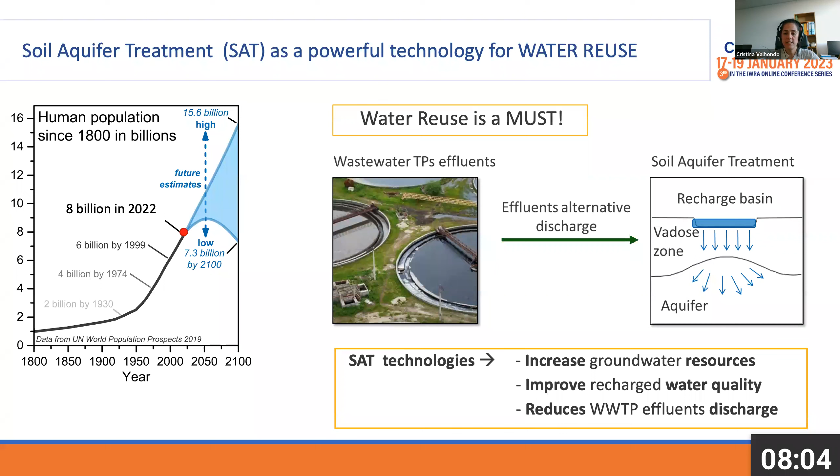And one option to do this is soil aquifer treatment, which is a special case of managed aquifer recharge that consists in induced infiltration of effluent of the secondary treatment of a wastewater treatment plant through the vadose zone to reach the aquifer. Doing this, we increase recharge water quality, and we also increase the groundwater resources. And besides, we reduce the direct discharge of this secondary treatment effluent into the aquatic environment. Next, please. No, the one before.

We have to be careful because the secondary treatment effluents are characterized for containing a number of contaminants, such as trace organic contaminants that are not completely removed in wastewater treatment plants, mainly because these plants are not designed to remove these contaminants; viruses and bacteria, that even if they are efficiently removed, they are not completely removed. And besides, we know now that wastewater treatment plants represent a hotspot for antibiotic resistance, which is going to be one of the major issues in the coming years.

And also micro and nanoplastics, that are highly persistent, and they include another problem, that they can facilitate the transport of other contaminants. So it's very important that we know the fate and behavior and the processes that control the behavior of these contaminants during soil aquifer treatment in order to avoid groundwater contamination. Next, please.

So the main two processes involved in the transport of these contaminants are sorption and biodegradation. And both processes are dependent on a number of parameters, including the physicochemical properties of the molecules, the surfaces, and also the redox state of the environment that controls the microbial community and the metabolic pathways that they apply to degrade the emerging contaminant.

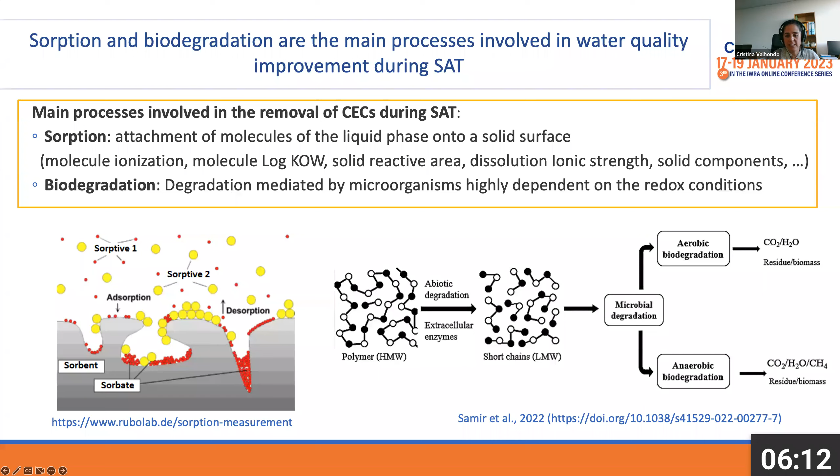So knowing the parameters controlling these processes, we can manipulate the system to increase the efficiency of these systems. One approach is, for example, to install reactive barriers in the infiltration area of this system. And this reactive barrier can provide new sorption sites that will increase sorption and also release dissolved organic carbon to the recharge water. So we will develop a broad range of redox conditions and we will increase biodegradation. And these reactive barriers have already been tested at field scale and they show very promising results.

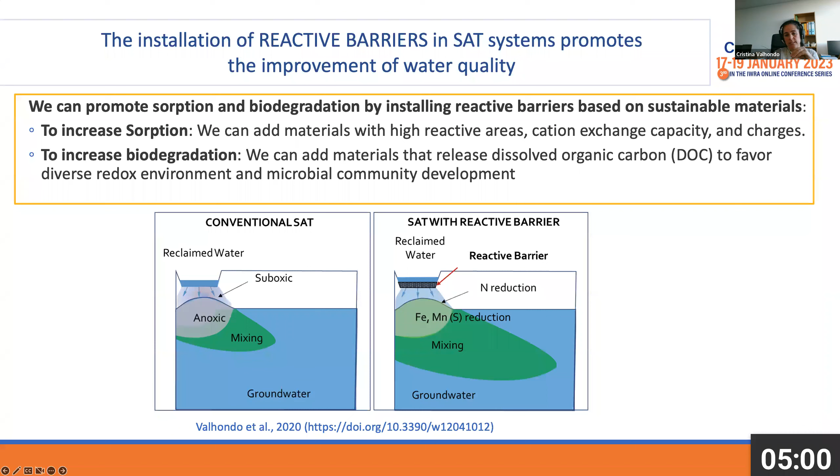So the objective was to study the capacity of several materials in order to improve the sorption of emerging contaminants. And we do so through batch experiments.

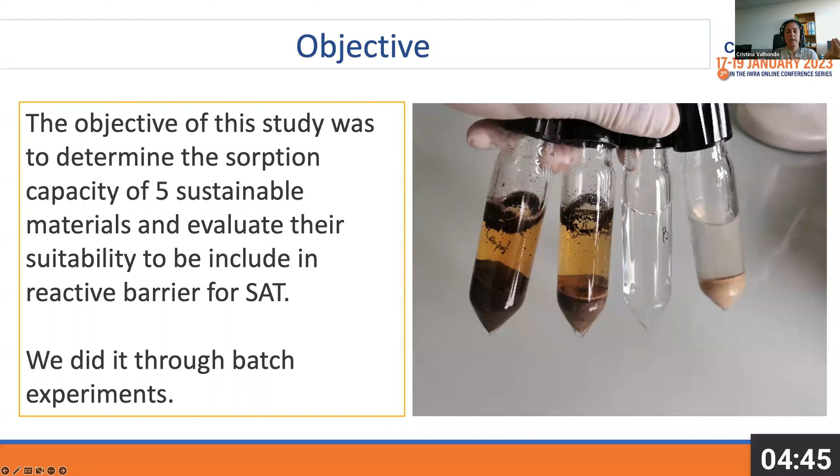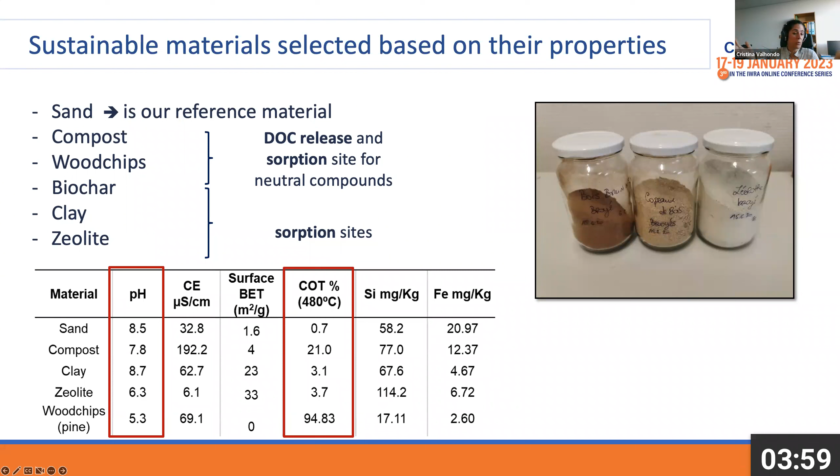First, we select the 5 materials and we compare their sorption capacity to sand. That is the material that we normally find in the infiltration area of SAT systems. The materials we select are based on their sorption capacity, like clay or zeolite, or because they are able to release a great amount of dissolved organic carbon into the recharged water. In this case, we select compost, wood chip, biochar, clay, and zeolite, and we measure the physicochemical parameters in the laboratory. And we have a great broad range of values of these parameters.

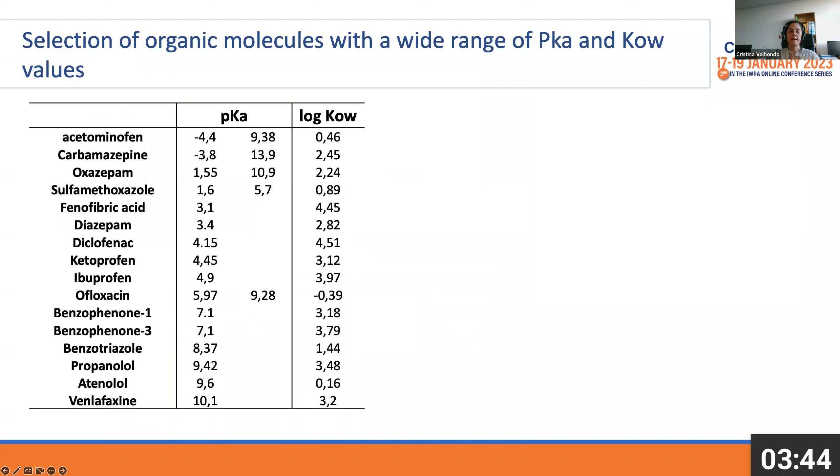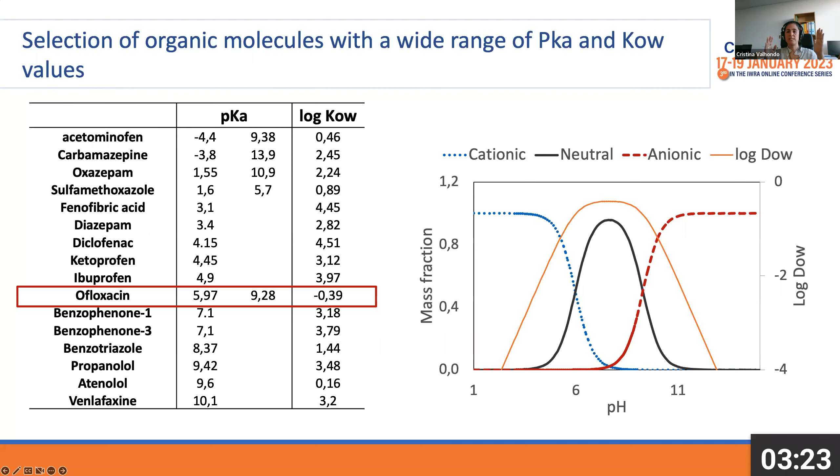The methodology consists in putting together a volume of water spiked with known concentration of these molecules and a volume of crushed material for 60 minutes. So the time is not enough to have biodegradation. And we also perform batch experiments without material to see if we have losses of the molecules due to processes other than sorption. Afterward, we separate the phases, we analyze the concentration of the molecules in the supernatant, and we are able to define the amount of molecules sorbed in the different materials.

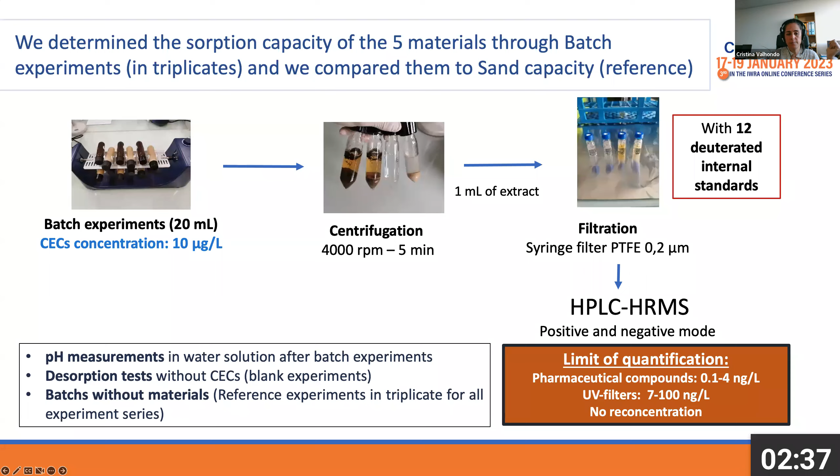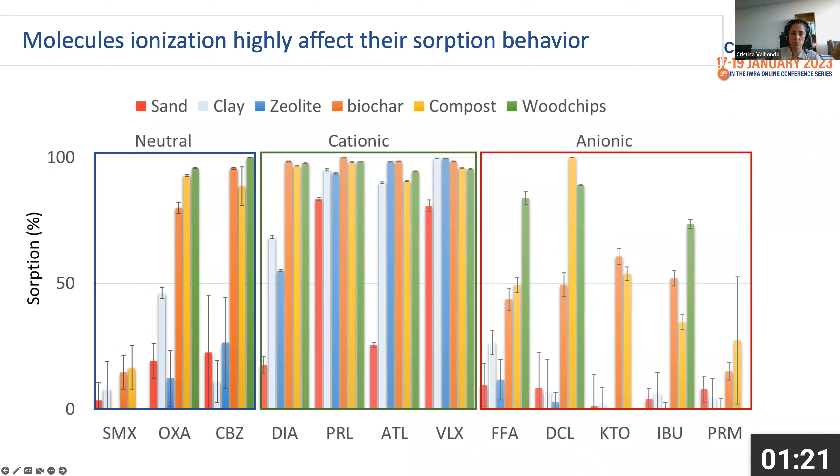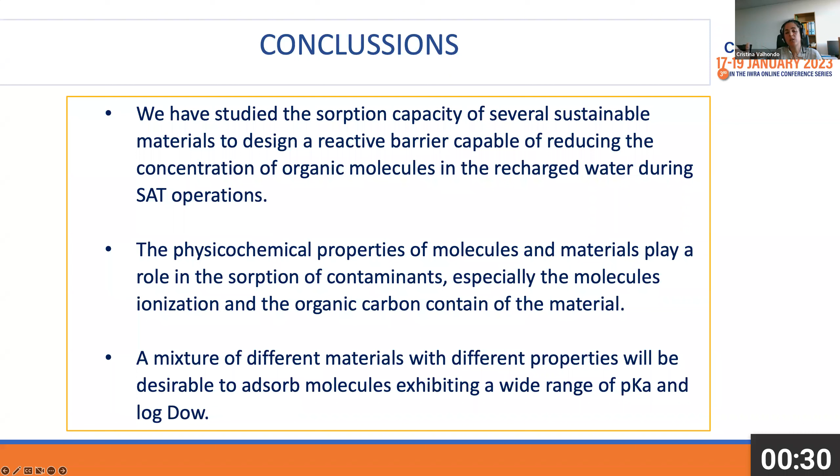So to summarize, we studied the sorption capacity of several sustainable materials and compared them with sand. And the physicochemical properties of the molecules and the material play a role in contaminant sorption, especially the molecules' ionization and the organic carbon content of the material. The molecule ionization we can also control in a way by adding some materials that give a lower or higher pH. So we have some capacity to manage the system by adding some materials. And finally, the optimal situation will be to have a mixture of different materials to increase the number of molecules that can be sorbed into this material.

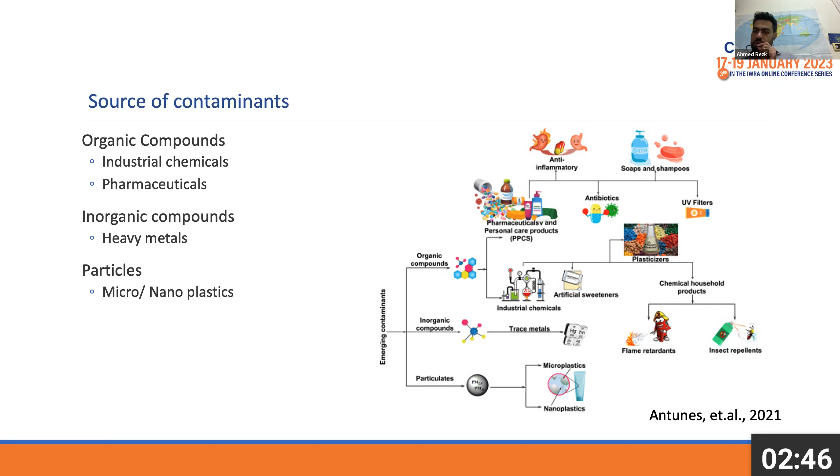And back in 2013, a paper in the Egyptian Journal of Occupational Medicine found that emerging contaminants exist in different wastewater sources, such as domestic activities, agricultural activities and industrial activities. The next slide, please.

Therefore, in order for us to define the emerging contaminants at the beginning of our project, we resorted to two main sources. First is the literature on the detection of emerging contaminants in Egypt, and also on the most prescribed medicines in Egypt and their consumption. And out of these lists, we check the human and veterinary use of the pollutants, the mode of action of each contaminant and the environmental impact of each contaminant. The next slide, please.

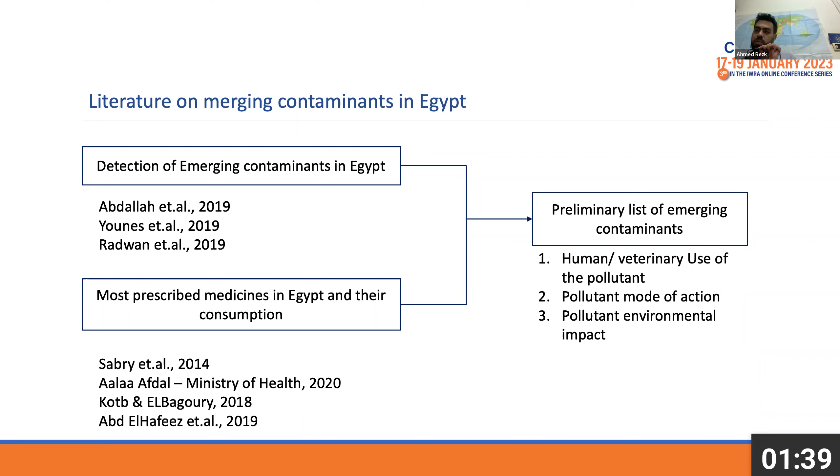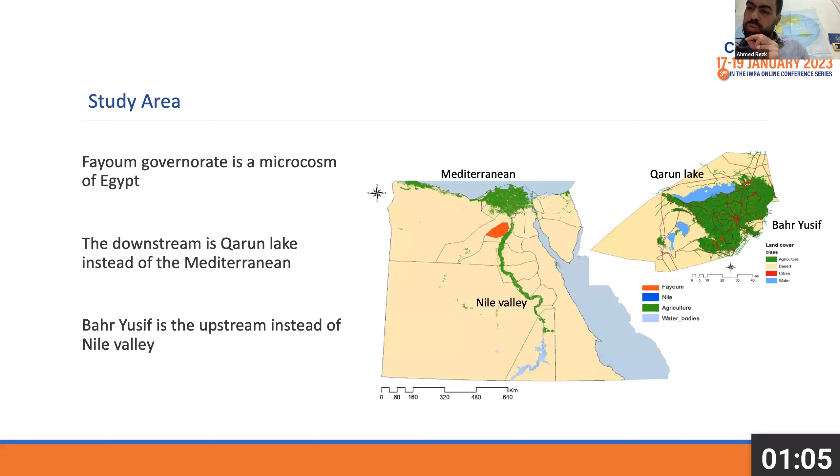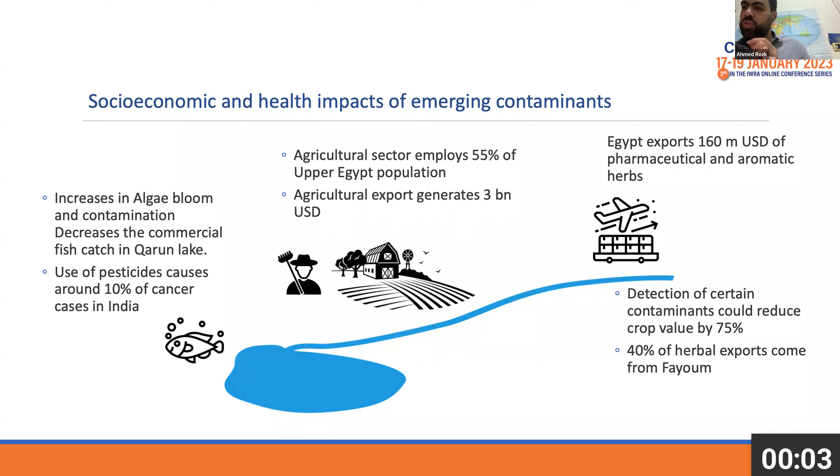And the impacts of these contaminants in Fayoum have three main lines. First is the contamination in Qarun lake, and then the contamination in the agricultural product, which reduces the value of the product and reduces the productivity of the land. The next slide, please. So the contamination in Qarun lake affects the commercial fishery in the lake, and also given that the agriculture sector employs a large section of the Egyptian population, especially in Upper Egypt, this has an adverse economic impact. The next slide, please.

Excuse me, Ahmed, can I ask you to summarize your bottom line, please, on your presentation? Yes, sure. Okay, so very rapidly, given the different adverse impacts of the emerging contaminants on the environment, and also the different sources of these contaminants, there is a need, I think if we could go to the last slide, please. Yeah, the next one. Yes, the one before it.

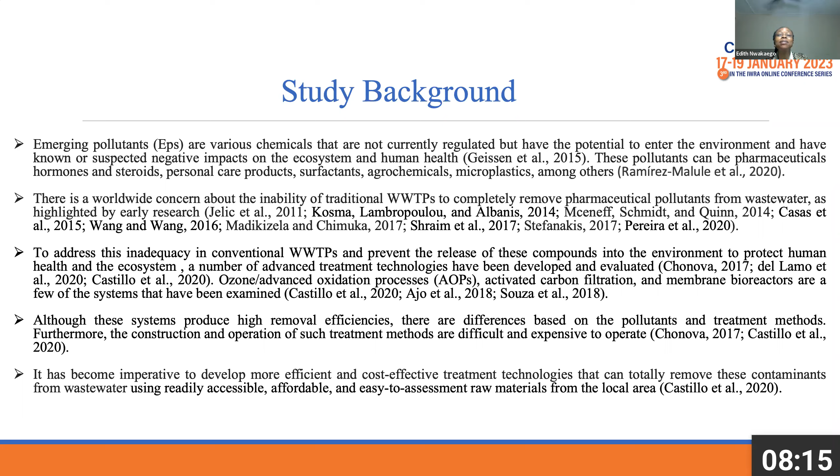Next slide, please. Clay can be molded into various shapes, which they retain when they dry. So naturally occurring clays are widely used for contaminant remediation due to their easy availability, high adsorption capacity, high porosity, high cation exchange capacity, and high surface area. Worldwide, clay has been used by man from time immemorial for both industrial and domestic application. Today, clay is still very useful in the ceramic industry for processing several forms of ceramic materials. However, the particular application of clay depends on its mineralogy, physical and chemical properties.

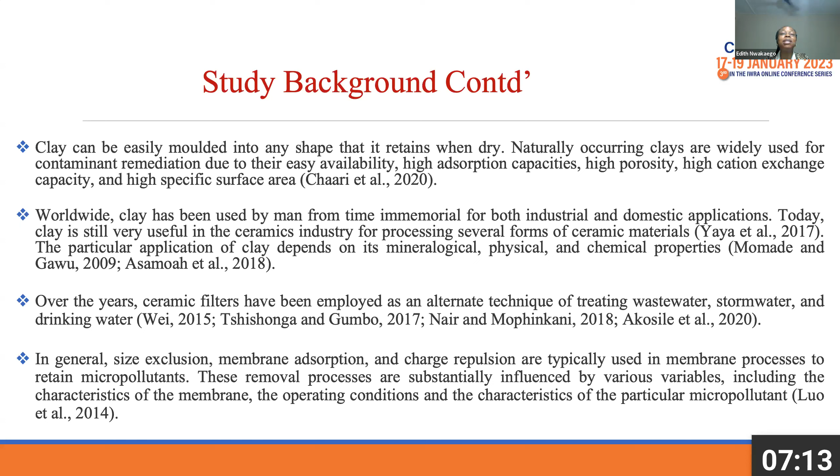Over the years, ceramic filters have been applied as an alternative treatment system for treating wastewater, stormwater, and drinking water. So ceramic filters achieve these removal processes through size exclusion, membrane adsorption, charge repulsion, sedimentation, biodegradation, among others. Next slide, please.

Next slide. So the aim and specific objectives of the study. The main aim of the study is to investigate the efficiency of the ceramic membrane filter for removal of pharmaceutical contaminants from wastewater through filtration experiments. Two is to determine the effect of operating parameters such as flow rate, pH, sludge retention time on the pharmaceutical removal efficiency. Three is to determine the effect of clogging on the ceramic membrane filter for 4 months continuous operation. Next slide, please.

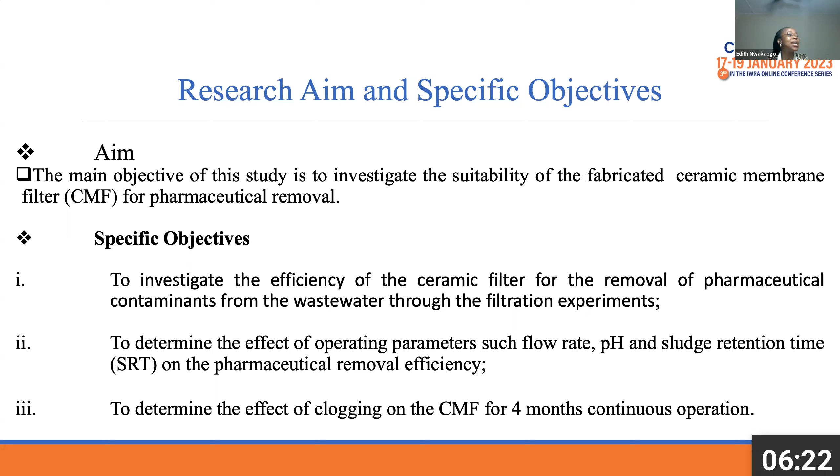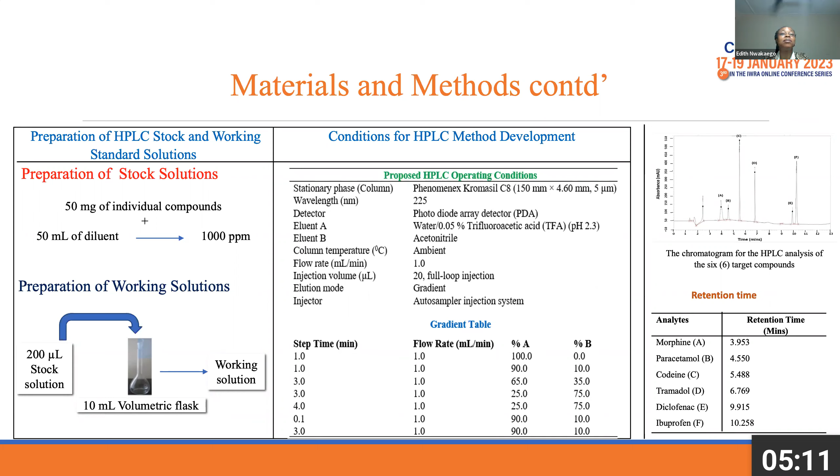Next slide. Now, this particular slide shows the operating parameters of the HPLC that was used for the analysis of the selected compounds. So over here, you can see the chromatograms of the HPLC analysis for the 6 selected compounds. The analysis of these compounds was achieved by comparison with the retention times in conjunction with the PDA, which is the photodiode array detector. Next slide, please. Now, over here is the slide showing the different processes that took place during the filter fabrication. Next slide, please.

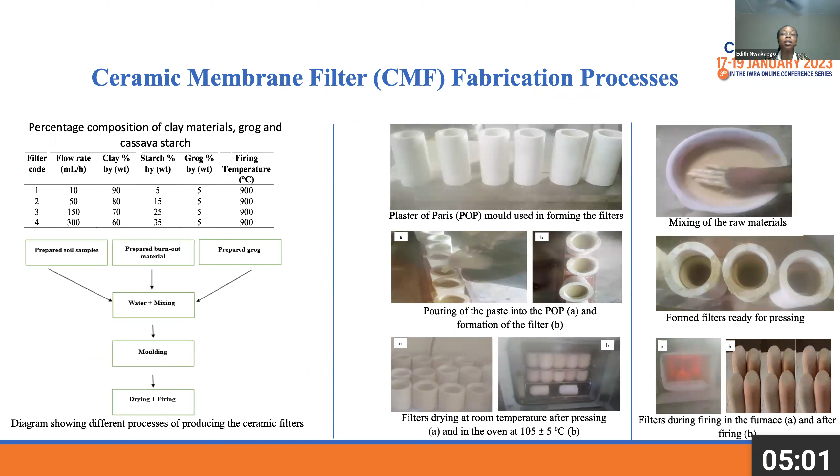Now, this is the setup for the ceramic filter experiment. So you can see the wastewater treated at the flow rate of 50, and then the one treated at 150 and 300. The one treated at 50 is more clear and more clean than the ones treated at 150 ml per hour and 300 ml per hour.

So this slide also shows the conditioning step of the SPE cartridges and then the extraction processes that took place. After the extraction processes, the analytes were eluted into chromatographic vials, and they are ready for HPLC analysis. After the HPLC analysis, the equation displayed here was used to calculate the removal efficiency. Next slide, please.

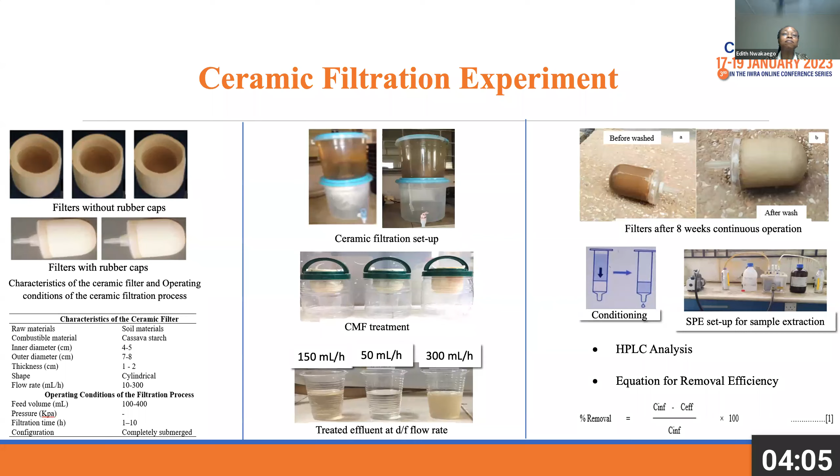Next slide. Now, the effect of flow rates on the pharmaceutical removal. The removal efficiency was tested for 4 different filters, such as 10, 50, 150, and 300 ml per hour, in order to select the best filter that can treat these pharmaceutical contaminants. Looking at the graph, it indicated that as the flow rate increases, there is a decrease in removal efficiency.

The reason is because as the water flows at a very high flow rate, it has less contact with the filter element, and that will reduce the rate of filtration, reduce biodegradation, reduce sedimentation, and also reduce adsorption, leading to a lower removal rate. So as the flow rate decreases, we have a higher removal efficiency. Next slide, please.

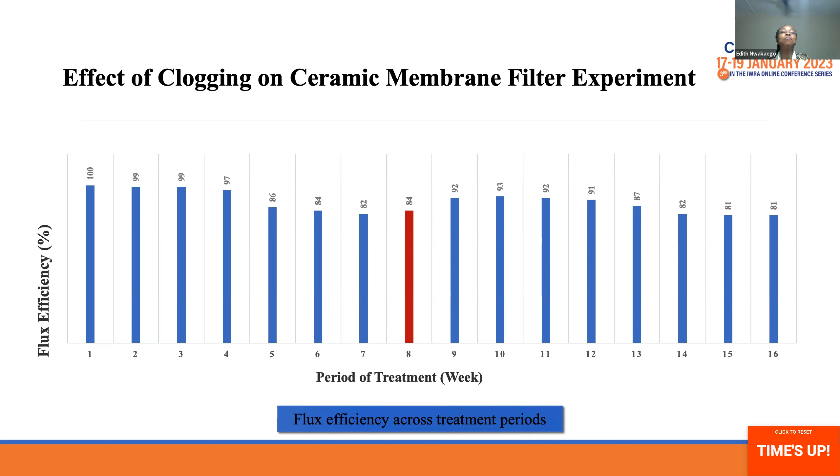Next slide, please. Can I ask you?

Oh, thank you. Conclusion. The present study indicated that ceramic membrane filter experiments operated at a smaller flow rate combined with increased retention time achieved the best performance among the studied compounds. Considering the high removal rate of other pharmaceutical compounds under normal wastewater conditions, the ceramic membrane filter can be considered an efficient and economical treatment method and could be applied in several related industries.

So the inability of the developed ceramic membrane filter to remove diclofenac and ibuprofen under normal wastewater conditions makes it easier for future researchers in the modification of the ceramic membrane filter with the objective of removing diclofenac and ibuprofen to an acceptable level. Thanks for listening.

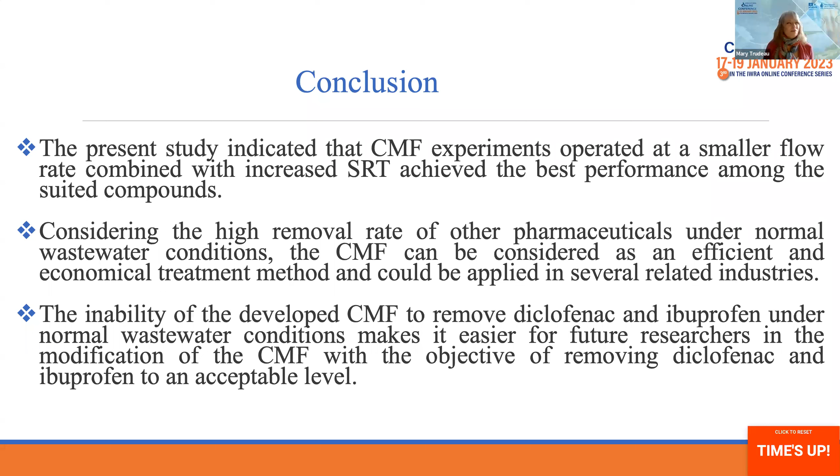Thank you very much, Edith, for that. The results are encouraging for a material that's as accessible as ceramic. Unfortunate about the ibuprofen.

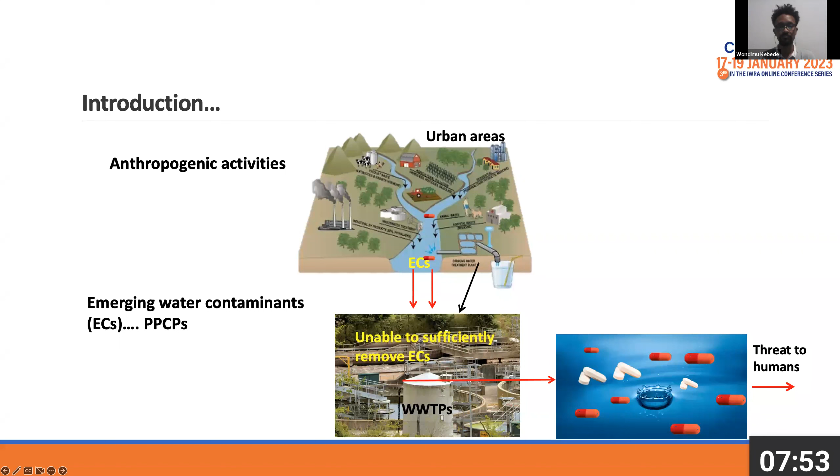As a result, various technological options have been implemented so far, like advanced oxidation processes such as ozonation, electrochemical oxidation, and adsorption processes, membrane technologies, but still there are issues associated like cost, safety, and operational difficulty. These membrane technologies, in most cases, are very costly, and operational difficulty is also there. So research intervention is still necessary to come up with low-cost, safe, and sustainable technological options.

In this regard, adsorption seems to be very interesting because of its low cost. We can prepare adsorbents from low-cost materials and even from waste materials. Next slide.

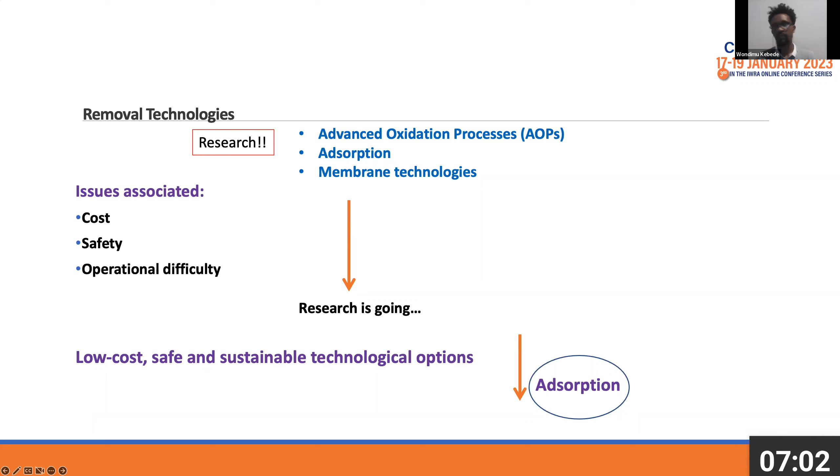So in our work, we prepared an adsorbent from bamboo sawdust, which is a waste material, and activated it chemically using potassium hydroxide and ferric chloride. Under heat, we chemically treated it, and the chemically treated bamboo sawdust was ground and carbonized at 700 degrees Celsius, and then used as an adsorbent in the subsequent adsorption process. Next slide.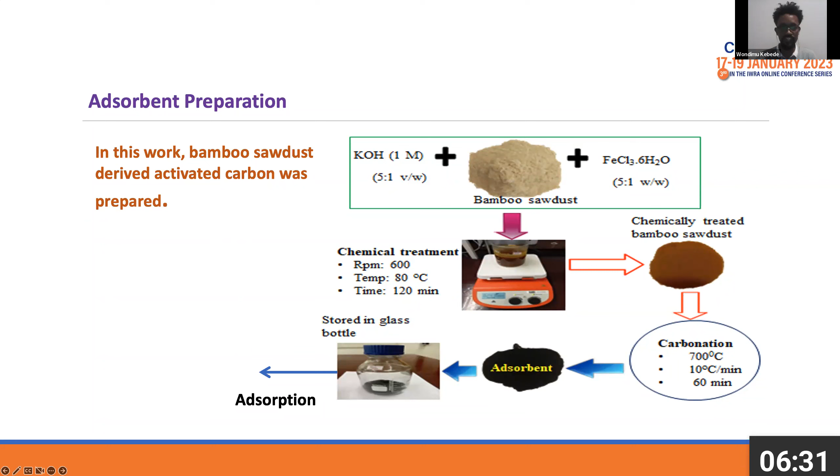When we come to the adsorption study result, the material that we prepared from bamboo sawdust resulted in the removal of 99.6% of paracetamol, which means almost complete removal. This high removal is associated with the high surface area of the material and some important functional groups incorporated during chemical activation. The adsorption process was characterized by the pseudo second order kinetic model, and the Langmuir isotherm gave the best fit to the adsorption data. Thermodynamically, the process was spontaneous and exothermic in nature.

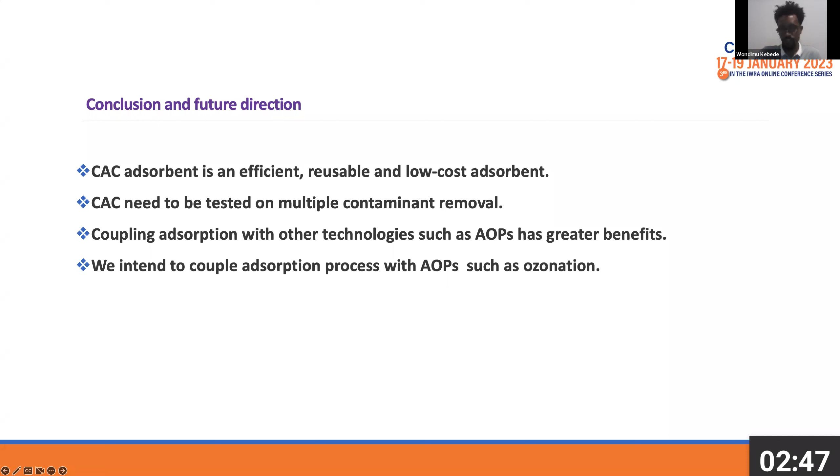Another thing is coupling adsorption with other technologies such as AOPs, advanced oxidation processes, has greater benefits because of the synergy, because each technology has its own advantages and disadvantages. So we intend to further test this adsorbent coupled with advanced oxidation processes like ozonation, so that we can have a synergistic effect in removal of multiple emerging pollutants at a time. So next slide, please.

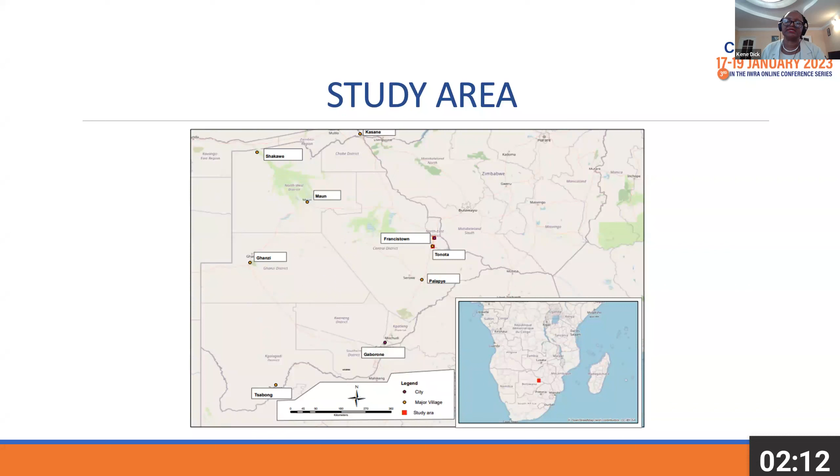Next slide. Now, the motivation for this study was the pollution that is caused by the wastewater generating facilities. The monitoring results over the years were indicating that the wastewater discharge facilities in the country are not in compliance with the wastewater discharge standard, BOS 93:2012. And the major contributors to the pollution are the trade effluent generating industries. And this study was trying to find a solution that can help these industries to curb the pollution at source. Next slide.

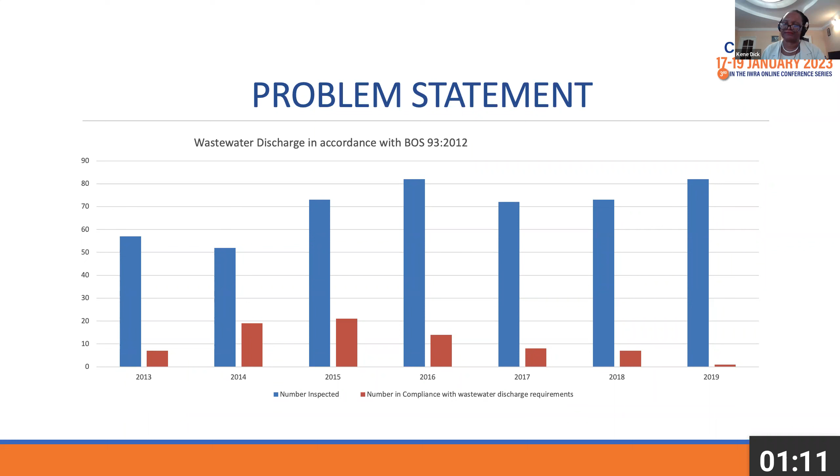This was a qualitative case study where data was collected through semi-structured interviews, as well as reviewing the documents that were collected from the industry. These were the annual reports, as well as the policy documents that were collected from the public domain and also from the government offices. And data was analyzed through data coding and then grouped into categories, and then themes and assertions were developed in order to answer the research questions. Next slide.

Now, the results of the study: as I've already indicated, the data was collected in the form of words, and these words were categorized or grouped accordingly to answer the research questions. And 6 themes were developed from the results of the study. Next slide is the last slide.

Now, the recommendation given to the industry is that the industry has to adopt the SD principles in their strategic framework in order to be able to curb the pollution at source, because we've already realized that it is difficult for the wastewater treatment facilities to treat industrial effluent because of its high strength or the composition of chemicals that it has.

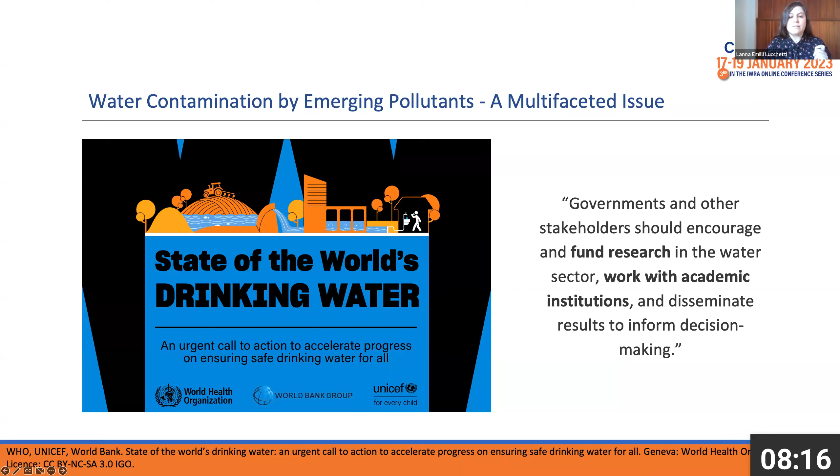And what those have in common is that they can react in a non-selective way with organic molecules, and these account for the structures of the vast majority of the emergent pollutants. So they can react with them in a non-selective way and break them down all the way to CO2, water, and inorganic ions. So this is a very interesting process when we are talking about a general solution to address the emergent pollutants contamination in water.

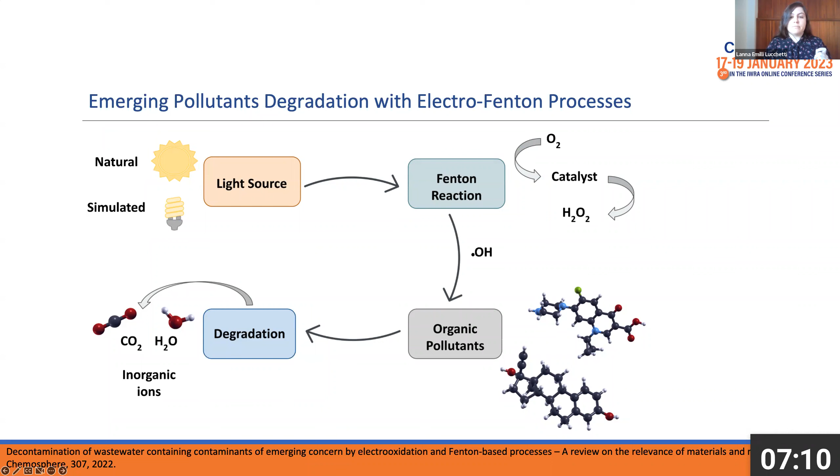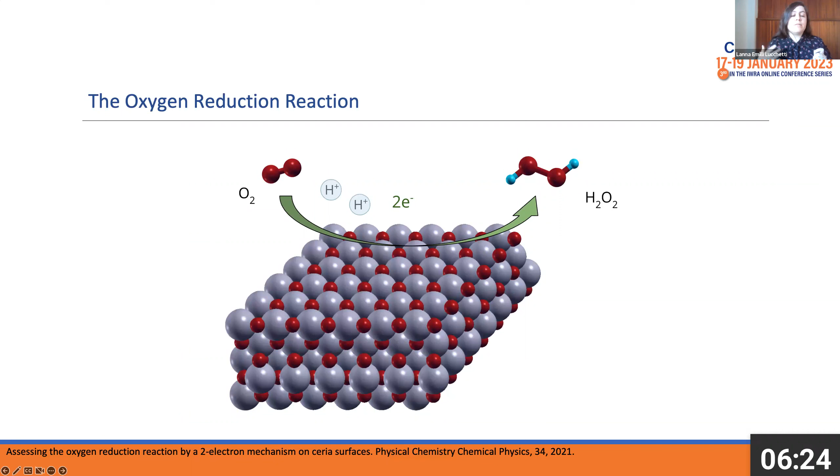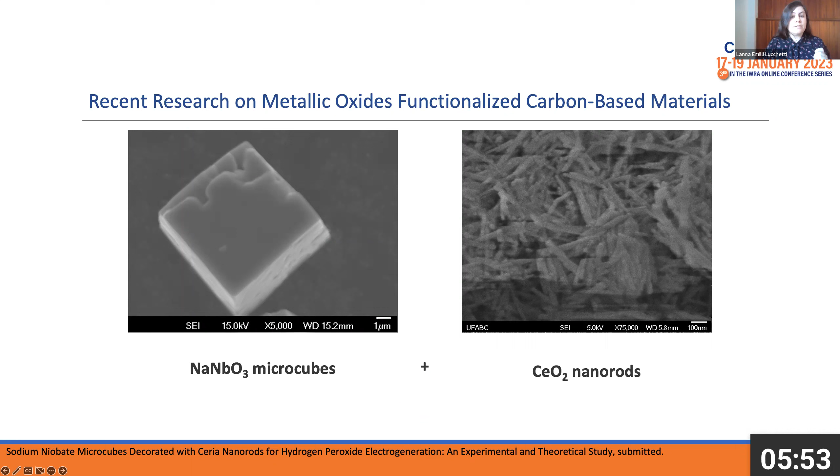So we work, as you've seen a little bit, with very different materials, very different oxides, but right now we are working with this very interesting material composed of sodium niobate microcubes functionalized with ceria nanorods. So we have two very good materials for this reaction, and combined they form these cool structures we can see here in slide 11, where the microcube is the sodium niobate and these tiny little bars are the ceria nanorods adsorbed on top of the surface.

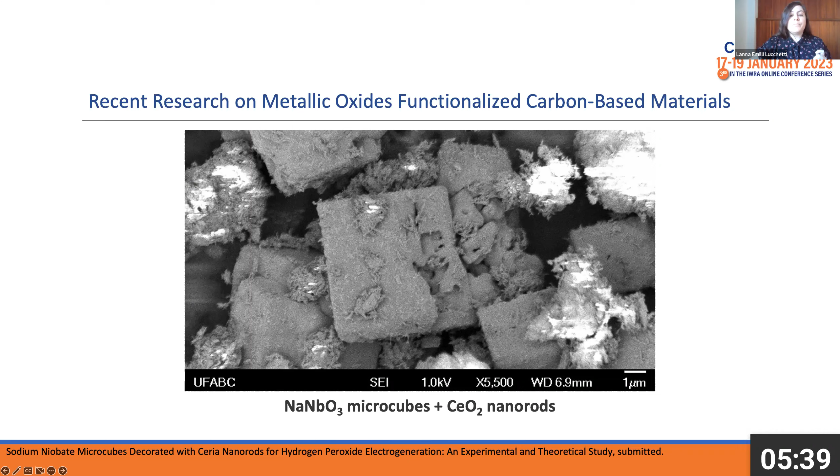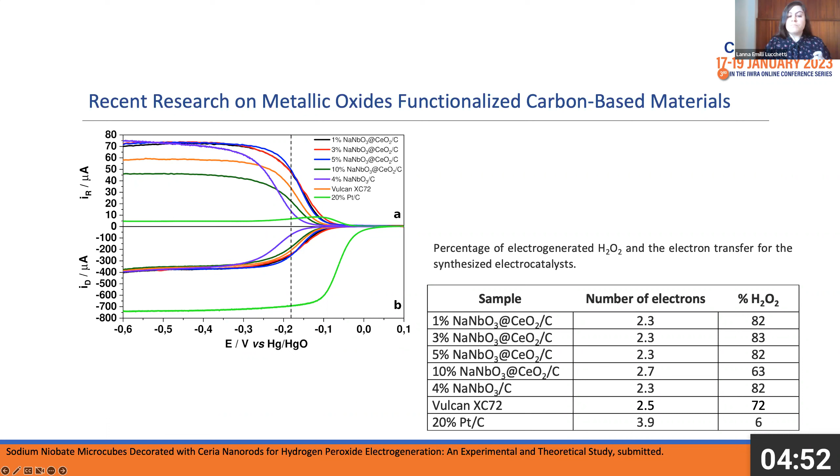We can look now at our materials and we can see that with only 1% of sodium niobate, we have 82% of hydrogen peroxide production. So with only 1% of catalysts made by cheap and readily available oxides, we have a material that already performs better than the commercial references that we have for that.